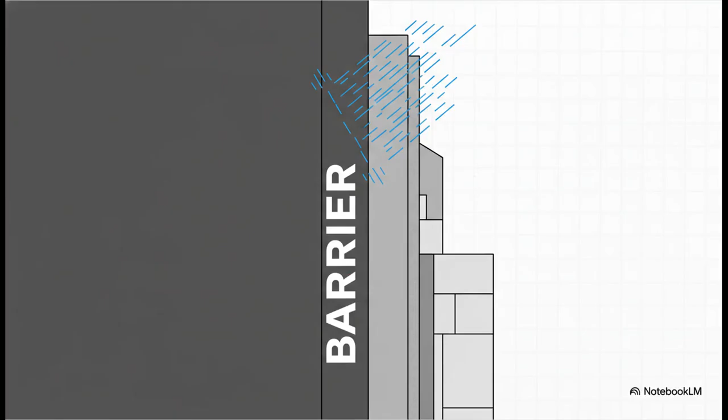For years and years, the thinking was pretty straightforward. Just build a perfect barrier, a single, solid, completely sealed layer. The goal was to wrap the building in a perfect raincoat, thinking, hey, if we make the outside absolutely waterproof, nothing can possibly get in. Simple enough. But here's the thing. In the real world, that's just a total fantasy.

Materials expand, they contract. Sealants get old, they crack, and they fail. And let's be honest, construction is never 100% perfect. Plus, you have powerful wind pressure that will force water through the tiniest little crack. So when that perfect seal inevitably fails, and it will, water gets in, it gets trapped, and that's when the nightmare scenario begins: rot, mold, and really catastrophic damage.

So, faced with this problem, architects and building scientists had to come up with something smarter. Instead of fighting this losing battle against Mother Nature, they designed a system that actually works with it. And that, my friends, is the Rainscreen philosophy. And here it is, the core definition you absolutely have to burn into your brain for the exam.

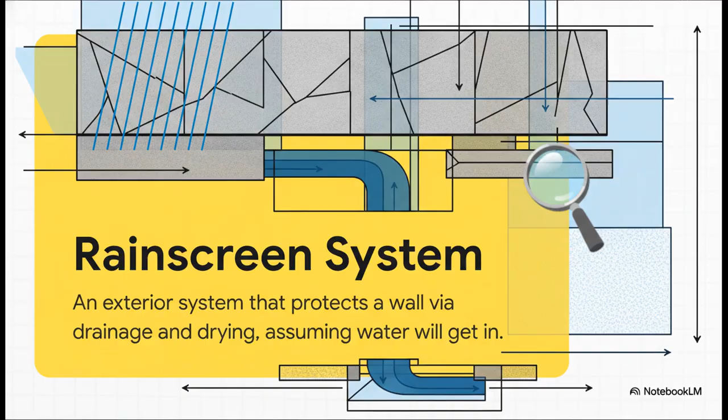A Rainscreen system starts with the assumption that water will get past that outer layer. So its job isn't to be a perfect barrier. Its job is to be a brilliant manager. It's a total mindset shift from water blocking to water management. This comparison right here is everything. Just look at the failure modes.

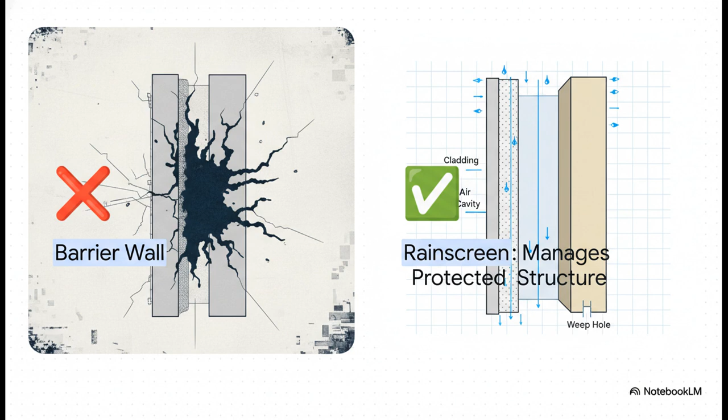A barrier wall is brittle. One little crack can lead to a massive failure. A Rainscreen, on the other hand, is resilient. It's built from day one to handle moisture, which makes it fundamentally stronger and more durable in the long run. Okay, so that's the big idea, but how does this philosophy actually work in the real world?

Let's peel back the layers and take a look at the key players involved, starting from the outside and working our way in. There are really 4 key players on the team. On the outside, you've got your cladding. This is your first line of defense, the screen that deflects most of the rain. Right behind that, you have the air cavity, and I'm telling you, this is the real MVP, the unsung hero

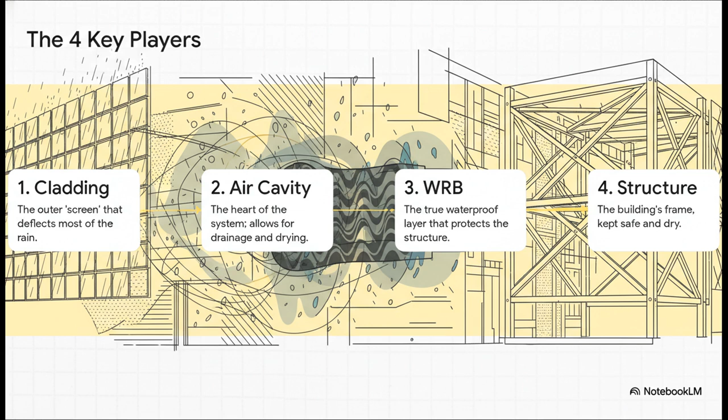of the whole system. Then comes the water-resistive barrier, the WRB. This is your building's actual raincoat. And all of these layers work together to protect the most important thing, the building structure. That little air cavity makes 3 amazing things happen.

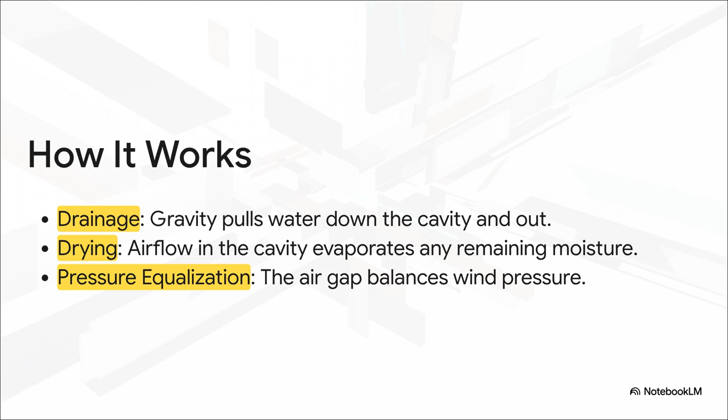First, drainage. Simple gravity pulls any water that gets past the cladding straight down and out. Second, drying. Air is always moving in that cavity, which helps evaporate any leftover moisture. And third, pressure equalization. Now this one sounds complicated, but it's genius. That air gap allows the pressure inside the wall to equal the pressure outside, which literally stops wind from sucking water into the building. It's pretty incredible.

Okay, this next point is huge, and it's a super common mistake people make on the ARE. Rainscreen is not a thing you buy off a shelf. It's not a material. It's a design methodology.

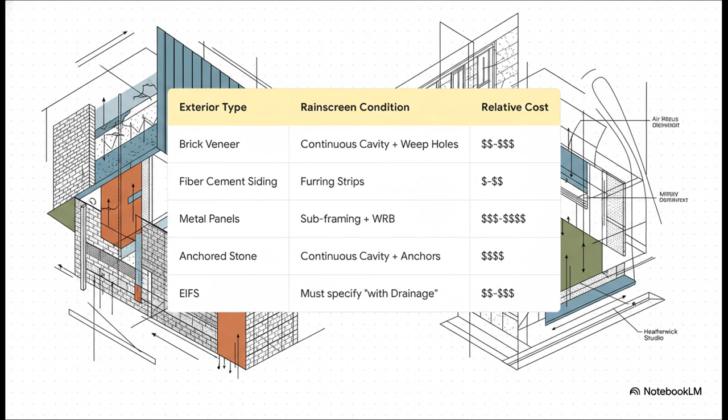It's a system. And you can create a Rainscreen with all sorts of different materials. So look, you can see everything from classic brick veneer to fiber cement to sleek metal panels. They can all be part of a Rainscreen. What really matters isn't the material itself, it's that middle column, the condition. You always have to ask, is there an air gap? And is there a clear path for water to get out and for air to get in? If the answer is yes, then you've got yourself a Rainscreen.

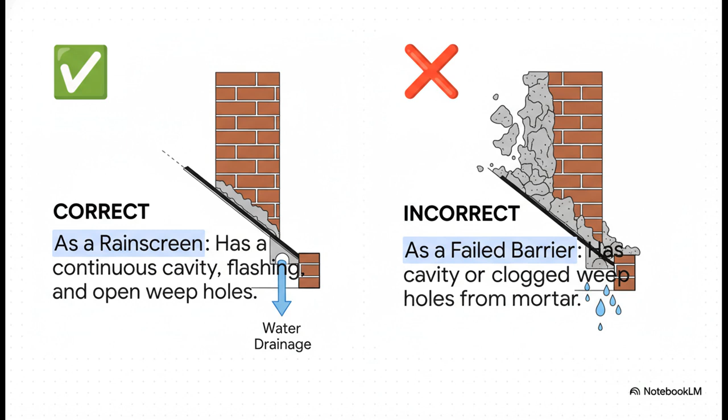All right, pop quiz. This is one of the most classic exam traps, so listen up. You see brick veneer wall on a test question, you automatically think Rainscreen, don't you? Well, not so fast. The answer is, it all comes down to the details. A brick wall only functions as a proper Rainscreen if those details are executed perfectly. It needs that continuous air cavity, it needs proper flashing at the base, and it needs clean, open weep holes for water to escape. The second that cavity gets filled with sloppy mortar droppings from the masons, it's game over. It's no longer a Rainscreen. It's just a leaky brick wall waiting to cause you a huge headache.

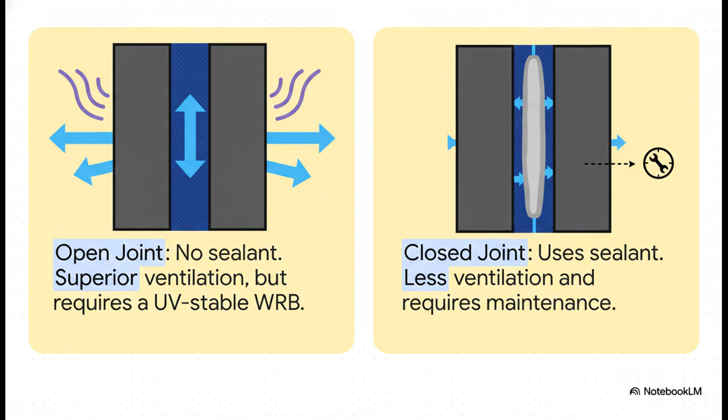Now, for panel systems, you've also got a couple of choices for the joints. You can go with an open joint system. This gives you amazing ventilation, and you never have to worry about maintaining sealant. The catch? Your WRB behind it is a bit more exposed, so it has to be really tough and UV stable. The other option is a closed joint system, which uses sealants. This blocks most water at the face, but now you've just added a long-term maintenance task. It's a classic trade-off.

All right, let's talk about the elephant in the room. Money, right? Every client, every project manager is going to ask, is this fancy system going to cost me a fortune? It really all depends on how you frame the discussion. It's not about short-term cost, it's about long-term value. And this chart tells the whole story. So yeah, that initial price tag for a Rainscreen system can be a little higher. You've got more components, a bit more labor, but look at the long game. The life cycle cost is way, way lower. It's the perfect example of investing a little more upfront to avoid paying an absolute fortune in repairs down the road.

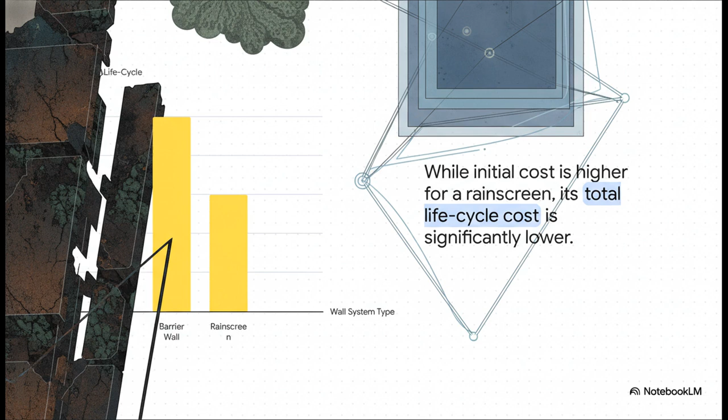This sentence right here, this is your golden ticket. You need to memorize this. This is your answer for the exam, and it's how you explain the value to a client. You're not just selling them a wall, you're selling them durability, risk management, and peace of mind for decades.

Okay, deep breath. We have gone through a ton of info, so let's lock it all in and boil it down to the absolute must-know facts for your exam. This is your ultimate Rainscreen cheat sheet. Let's hit these fast. 1. It's a system that does 3 things: drain, dry, and control pressure. 2. The air cavity is non-negotiable. No gap, no Rainscreen, period.

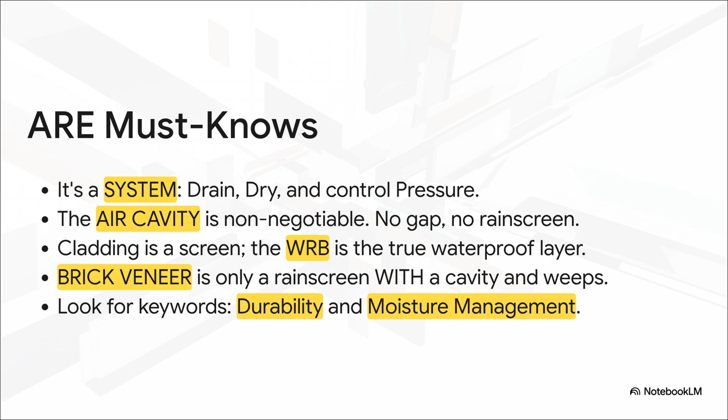3. The cladding is just a screen. The WRB is the real waterproof layer. 4. Don't fall for the brick veneer trap. It only counts if it has a clean cavity and open weeps. And 5. On the exam, when you see keywords like durability, moisture management, or long-term, your brain should immediately scream Rainscreen.

And we're going to leave you with this final thought. This shift in thinking is about so much more than a technical detail. It's about creating buildings that aren't just static fortresses, but are dynamic, resilient systems that work with nature. So the next time you're at the drawing board, don't just ask if the wall is sealed. Ask yourself, how does it breathe? Because that is the secret to designing a building that will truly last.